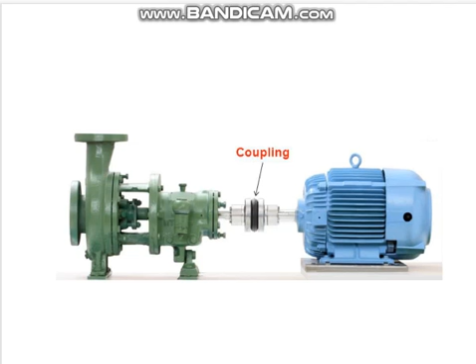We were seeing about the couplings. Here is a picture of an electric motor and a pump, used for a centrifugal pump for pumping water. This is the shaft of the motor, and this is the shaft of the pump. Is it necessary that both should be of the same size? Not necessary. The thing joining these two is the coupling.

We have seen the flanged coupling. This is a simple flanged coupling, also called unprotected flanged coupling. The diagram is like this. We will see the design of these things. What are the important things? This is the shaft, the keys are at right angles. In the side view, this will be at right angles, and the diameters, capital D, D1, D2, these are important. The diameter of the bolt and the thickness of the flanges, TF, and this is the length of the flange. These are the important things.

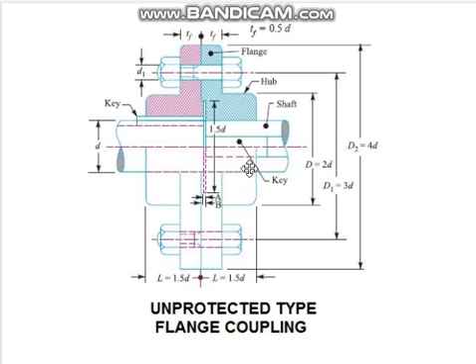Similarly, when you come to the protected type, this is the protected type flange coupling. Only that a little protection is provided. Protection to whom? When it is rotating, it should not catch any loose garments or sleeves of shirts, and it should not pull or hit the hands of the workers. So when it is like this, the nuts and bolts are not exposed, that is why protection. This is much similar, only that there is this TP extra, the thickness of protection. TF is the thickness of the flange, TP is the thickness of protection. The proportion given is 0.25 D, and that's what you have to use.

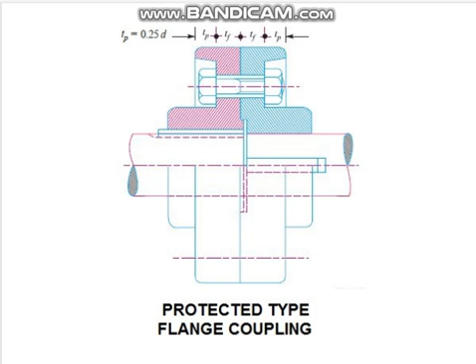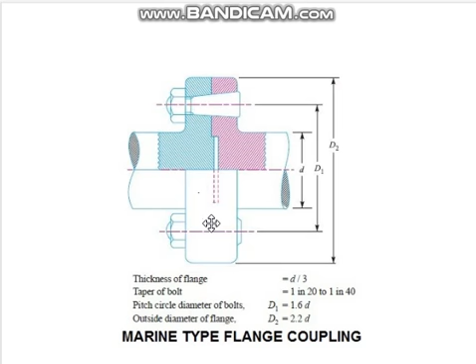Then there is another coupling called marine type flange coupling. This is also much similar, only that the shaft itself, you see, there is no key involved. The shaft end itself is forged in such a way that it becomes a flange. Also here we are not using an ordinary nut and bolt. Some tapered bolt is used, and nut. This is called marine type flange coupling. Marine means they must be using these things for use in ships and other things, in sea applications.

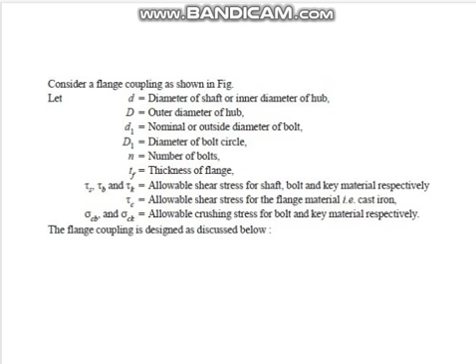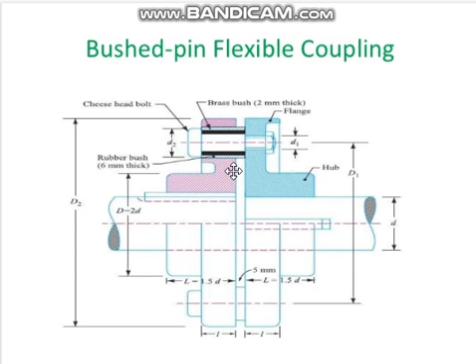How much flexibility, in what way is it flexible? If any angular misalignment is there, it may vary, some 2 degrees, 3 degrees, maybe maximum 5 degrees, not more than that, of angular misalignment can be taken. This also will design. Here you see there is a space, 5 mm space between these two. So this is the change when we are designing.

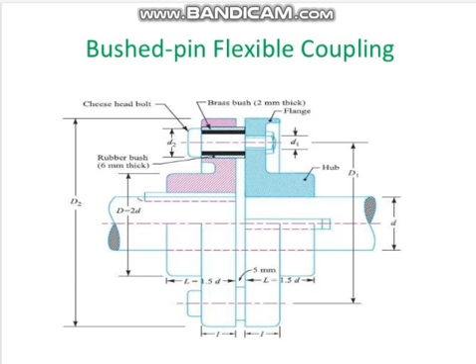We have already seen how the rigid flanged couplings look. They are widespread in use, simple in construction, and they are rigid couplings. They transmit force by shape and friction. That's it. There is another rigid coupling here.

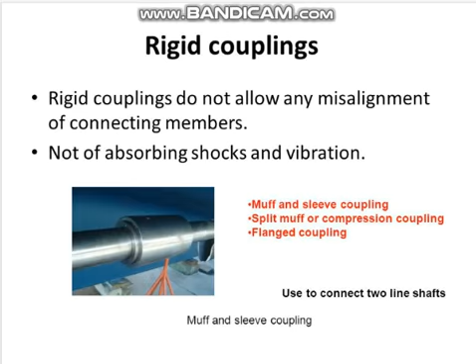Can you identify this coupling, what it is? This coupling is the simple muff coupling or sleeve coupling, without the split. The advantage of this is there are no projecting parts, therefore less chance of accidents and other things. But the thing is, more space is required to insert this sleeve in the middle. And this is the universal coupling. You can see here the double universal joint assembled, and this is a single universal joint.

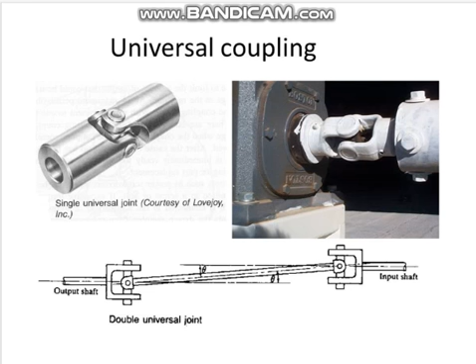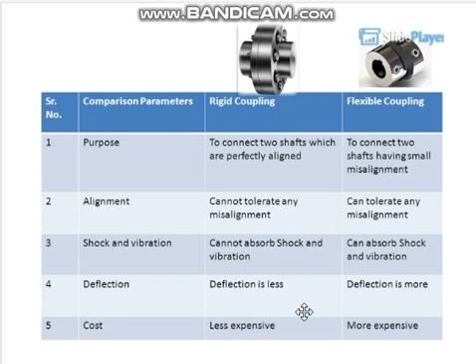Here is the comparison between rigid coupling and flexible coupling. Rigid coupling is used for connecting perfectly aligned shafts, while flexible coupling is used when small misalignment is present. Rigid coupling cannot tolerate any misalignment, but flexible coupling can. Rigid coupling cannot absorb any shock or vibration, while flexible coupling can absorb shock and vibration, though not everything, only some of it. Deflection is less in rigid coupling and more in flexible coupling. Rigid coupling is less expensive, flexible coupling is more expensive.

Now let us come to the design of the unprotected flange coupling. We have already seen the design of muff coupling. Now let us see about the flanged coupling.

Let D be the diameter of the shaft, and for our design we are assuming both shafts are of the same diameter, though in actual practice they may differ. The outside diameter of the hub, capital D, is taken as 2 times the diameter of the shaft. These are empirical relations.

You get all the dimensions just by looking at the figure. D1 is the PCD, meaning pitch circle diameter of the bolts, that is, from the center point of one bolt to the center point of another bolt. PCD is 3 times the diameter, and the outside diameter of the flange is taken as 4 times the diameter. So this is 1 times diameter, this is 2 times, this is 3 times, this is 4 times diameter. It is very simple to remember, is it not?

This little projection here is 1.5 times the diameter, and the length of the hub is also 1.5 times the diameter, with this diameter being D1. And TF is also related to the length of the flange, using some proportion.

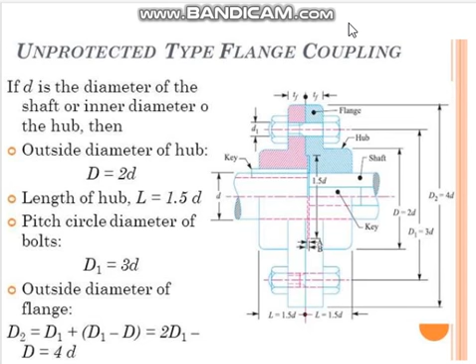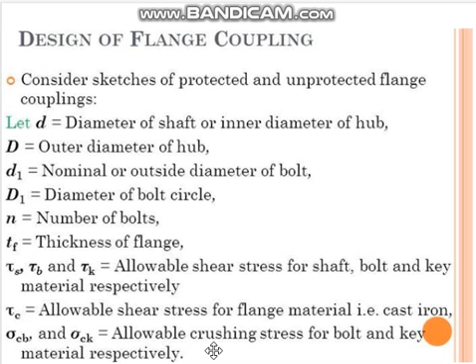So these are the notations we'll be using: small d, capital D, small d1, capital D1, N is the number of bolts, TF is the thickness of the flange, tau S is the shear stress for shaft, tau B is the shear stress for bolt, tau K is the shear stress for key. All may be different materials, but it can be the same when we are solving problems, to keep it simple. Tau C is the allowable shear stress for the flange material if it is cast iron or something. So many things are there: shaft, bolt, key, flange. Sigma CB and sigma CK are the crushing stresses for bolt and key materials respectively.

Now, whether it is a shaft, a key, or a coupling, the first step is to design the shaft. So for designing the shaft, we use T equals pi by 16 tau D cube, from which we first find the diameter D, and afterwards the second step is design of the hub.

In the design of the hub, we consider it to be hollow, but all those dimensions are already according to the proportions we found out. What we are doing is only finding the induced shear stress and checking whether it is within the permissible limit or not. So with this formula, T equals pi by 16 tau D cube, into 1 minus k to the power 4, this is the formula you should use for designing the hub, considering it to be a hollow shaft.

The outer diameter of the hub is usually taken as twice the diameter. From this relation, the induced shear stress in the hub is checked, and the length of the hub is taken as 1.5d. This is also a proportion, and we have already seen all the proportions in the figure itself.

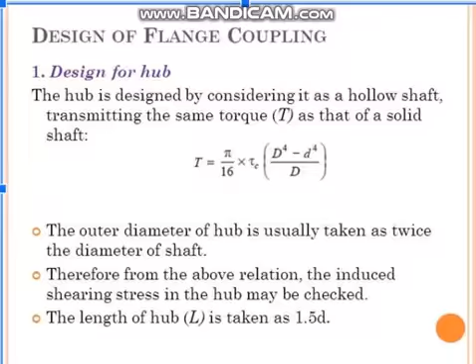Next is the design of the key. The key is designed with usual proportions, then checked for shearing and crushing stresses. Usual proportions mean d by 4 and d by 6, that is the width and the thickness. The material of the key is usually the same as that of the shaft, and the length of the key is taken equal to the length of the hub.

Length is according to whatever length we should take. And the design of the flange, the flange at the junction of the hub - the junction of the hub is under shear.

When this is rotating and the key is rotating, this is rotating, and these nut bolts alone are stationary. Suppose this is rotating, this is not rotating - what will happen? It will shear here, it will cut here. How will it cut? It will cut on the circumference, the entire circumference.

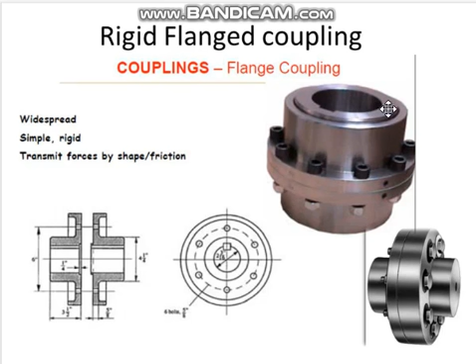This thing is there, no? If this part is rotating and this is not rotating, this flange is not rotating, this hub is rotating, what will happen? In the joint here, the entire circumference, it will shear off. That is the meaning. In that case, what will be this area of failure?

Area of failure will be the circumference pi capital D, and the thickness is TF. Pi D TF, that will be the area. So that you should put here. Circumference of the hub and thickness, this is the area, into shear stress into radius will give you the torque.

Mathematically, T is equal to pi D into TF, tau C, into D by 2. From this, the thickness of the flange is usually taken as half the diameter of the shaft. Thickness of the flange means TF is 0.5 small d. Therefore, from the above relation, the induced shear stress in the flange can be checked.

Then next comes the design of bolts. How do they fail? This bolt - suppose when we are designing this, we thought that this is not rotating, other things are all fine, so here it sheared.

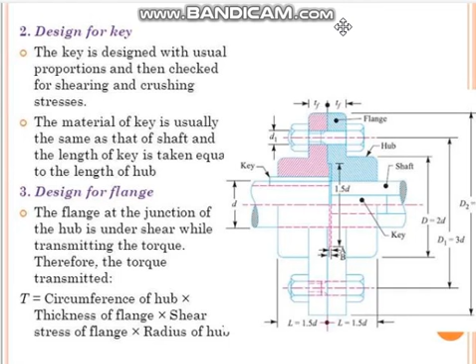Suppose now when we are designing this, what we'll think is this also is trying to rotate, only that this is not rotating. Then what happens in the middle? This bolt gets sheared off. How many nuts at the same time? Suppose there are 8 nuts there, so 8 nuts should be sheared. If there are 4, 4 should be sheared, like that.

So the bolts are subjected to shear stress due to the torque transmitted. The number of bolts is small n. This depends upon the diameter of the shaft. The pitch circle diameter, capital D1, is taken as 3d. This we saw in the figure itself.

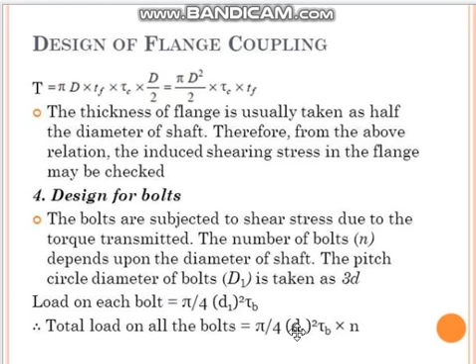Load on each bolt - what is the area of the bolt that is resisting? Pi by 4 d1 square. If you multiply this by shear stress, you get the load on one bolt, and there are n bolts, so total load is this into small n. Therefore, the torque transmitted, capital T, is equal to pi by 4 d1 square into tau b into n into capital D1 by 2. Why capital D1 by 2?

Where are the bolts? Bolts are at a distance d1, so this is d1 by 2, because from the center you have to take the distance. When you are designing the key, the distance is only small d by 2. When you are designing the hub, it is breaking here, this distance is capital D by 2. When you are designing the bolt, it is this distance, so that distance is capital D1 by 2. These things are changing at every point, for key, for flange, and for bolts.

From this equation, the diameter of the bolt may be determined. You can calculate it. Now that you have the diameter of the bolt, you should check for crushing. There are two ways in which this may fail - one is in shearing, the other is in crushing.

Crushing - the area will be this much. That means the projected area, tf into d1 it should be. tf into d1 and n number of bolts, so this is the crushing area.

You should think a little about how this area comes. Crushing area is the projected area. How the crushing takes place - you should consider only half of this flange alone, not the entire thing, because crushing takes place in the half flange only. So the total crushing strength, you will get this equation.

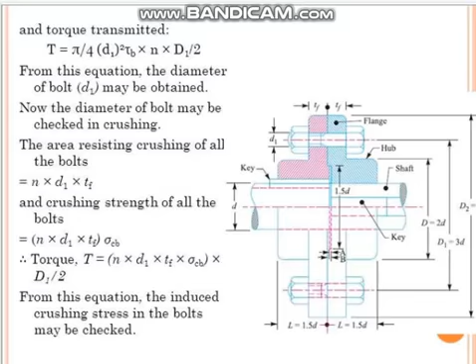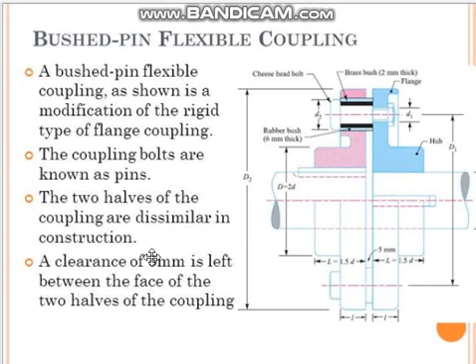Between them 5 mm is left. Next, this bush pin type flexible coupling, the main modification is to reduce the bearing pressure on the rubber or leather bushes, and it should not exceed 0.5 Newton per millimeter square. Instead of the nut bolts, simple bolts, we are using pins. This pin we are using is called a pin, otherwise you can call it a cheese head bolt or something. The bearing pressure should be within 0.5 Newton per mm square, within that you should maintain.

Actually, because there is a rubber bush here and also a brass bush here, it allows a little angular misalignment, maybe 2 to 5 degrees. In order to keep the low bearing pressure, the pitch circle diameter and pin size are increased, it seems, because this should be less.

Now let L be the length of the bush in the flange. L is from here to here. In this gap of 5 mm also, the bush is there. D2 is the diameter of the bush.

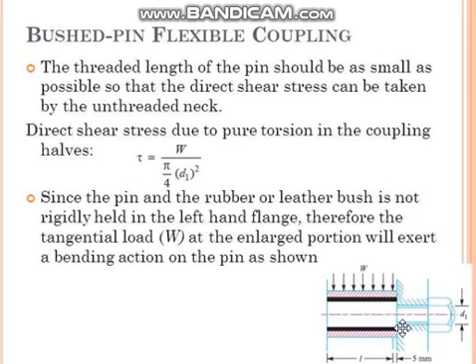If you see here, this W is acting at the center. And center means what? It is at the distance of L by 2, and also there is a gap of 5. So this L by 2 plus 5 will be the distance at which this is acting, and that into W will give you the moment.

Once you know moment upon section modulus, this is for each pin we are calculating. The bending stress is bending moment upon section modulus. Bending moment we are getting as W into L by 2 plus 5, divided by Z which is pi by 32 d1 cube.

Since the pin is subjected to bending and shear, crushing is different, bearing pressure is different, that is a localized stress. But these are bodily stresses. These body stresses are two: one is bending as well as shear. See, bending stress is sigma stress, shear stress is tau stress. These are two different categories of stresses.

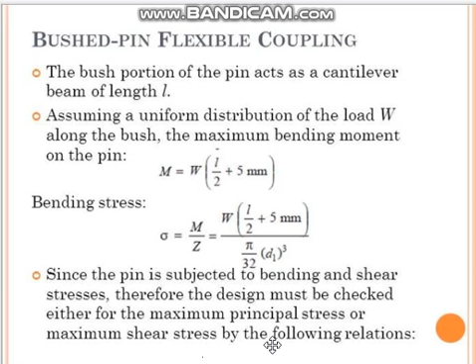Therefore, the design must be checked either for maximum principal stress or maximum shear stress by the following relations. You have to go for principal stresses, because there is sigma also, there is tau also. The maximum principal stress formula is half of sigma plus square root of sigma square plus 4 tau square. And the maximum shear stress is half of square root of sigma square plus 4 tau square. So these are the two formulas by which you can find out the principal stresses: sigma 1 is the maximum principal stress, and tau maximum is the maximum shear stress.

The value of principal stresses varies from 28 to 42 MPa, depending upon the material. After designing the pins, the rubber bush, the hub, key and flange may be designed in a similar way.

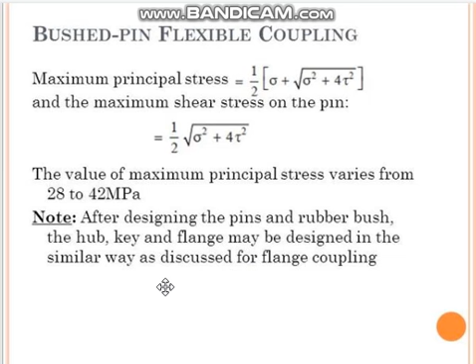I think we can see one problem. Design a bushed pin type flexible coupling to connect a pump shaft to a motor shaft transmitting 32 kilowatts at 960 RPM. The overall torque is 20% more.

This is 20% more torque, that means if you are considering T maximum, it will be 1.2 times of T mean, the mean torque. The material properties are the allowable shear stress and crushing stress for shaft and key, that is tau for shaft and key.

They said okay, that is the same material. That means this tau k or tau s is 40 MPa, and the crushing stress will be 80 MPa, for shaft as well as key. And then allowable shear stress for cast iron is 15 MPa, that is tau c is 15 MPa. This will be much less compared to the other, because this is mild steel and this is cast iron. And the bearing pressure is only 0.8 Newton per mm square.

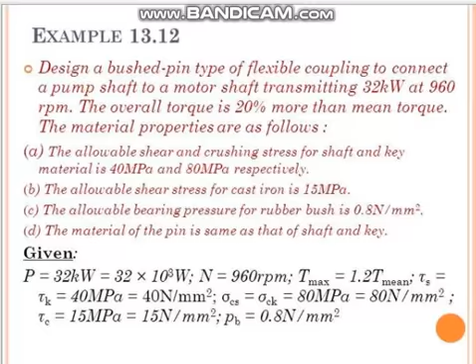And then first what you have to do is find the diameter of the shaft. For diameter of the shaft, first you have to find out what is T.

If T is not directly given in the problem and power is given, we have to calculate T. So first, what we are getting here in this power equation is mean torque, which comes to 318.3 Newton meter. Then the maximum torque you have to calculate, because they said 20% more, so you have to multiply it by 1.2.

And then what you have to do is the torque transmitted by the shaft, capital T maximum, is 7.86 d cube. In terms of d cube you are getting that, and you equate it to shear stress of the shaft. When you equate that, you will get the value 36.5, and they have rounded it to 40 mm.

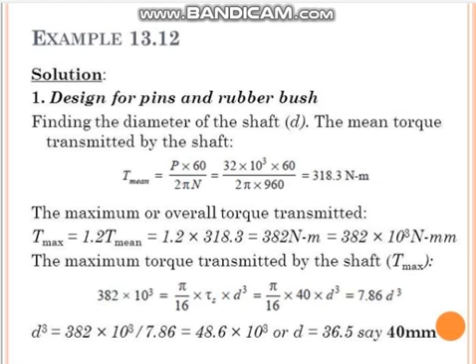Now next, what you have to do is, we have discussed in rigid type flanged coupling that the number of bolts for a 40 mm diameter shaft is 3. You will get a table there: if it is 40, it is 3, and you should know when to take 4, when to take 6, like that.

In flexible coupling, we shall use the number of pins n as 6. For our problem here, we take it as 6. Actually, in real practice, it depends upon the diameter of the shaft.

So the diameter of the pin D1 will be 0.5d upon square root of n. This is the formula that we are using, where small d is the diameter of the shaft. This comes to 8.2 millimeters.

The length of the pin of least diameter, that is capital D1, is 20 mm, is threaded and secured in the right hand coupling half by a standard nut and washer. Actually, there are threads in the right hand coupling half also, and nut and washer also are there. And the length of the pin of least diameter is D.

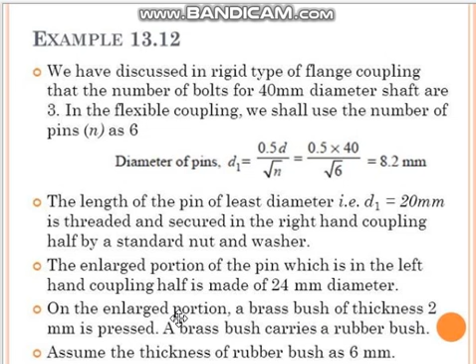The enlarged portion in the left hand coupling is made of 24 mm diameter, a little more than that. On the enlarged portion, a brass bush of 2 mm thickness is pressed. The brass bush carries a rubber bush, and the rubber bush thickness is 6 mm. That means on the radius side 2 mm is increasing, on the radius side 6 mm is increasing, so 8 mm is increasing on this, as you will see.

So therefore, the overall diameter of the rubber bush will be D2 equal to 24 plus 2 plus 2 plus 2 into 2 plus 2 into 6, so 40 mm. So the pitch circle diameter will be, then you can calculate, 2D plus D2 plus 2 into 6, that is 2 times the diameter plus 40 plus 12. From where are you getting this?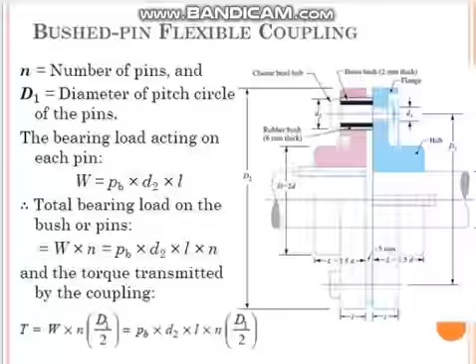Then the length of the bush in the flange is L, and the bearing load acting is D2 into L into PB. PB is given, so this is 40. We have calculated into L, that means W is 32 into L.

This multiplied by D1 by 2 will give you the torque. So torque is equal to maximum torque only. On all designs, you take maximum torque. So 32 into L into 6 into 132 by 2, you will get this value, and tau maximum. From that you will get L, and L will be 30.1, say 32, and you can find out what is W in that case, will be 32 into L, and this comes to 1024 newtons.

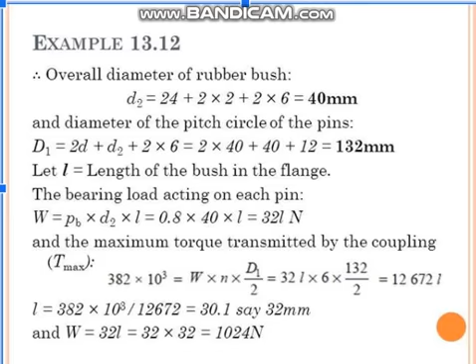And then the direct stress due to pure torsion in the coupling halves. In the coupling halves, direct stress will be, where it will be failing? It will be failing at... what is failing? Direct stress due to pure torsion in the coupling halves. The coupling is failing at D1.

Oh no, this is not coupling. This is the direct shear stress in the pin, that's why we are using D1. So this is pi by 4 into 20 square. In the enlarged portion, the shearing will not take place. Shearing will take place at the minimum section, where minimum section is small d1.

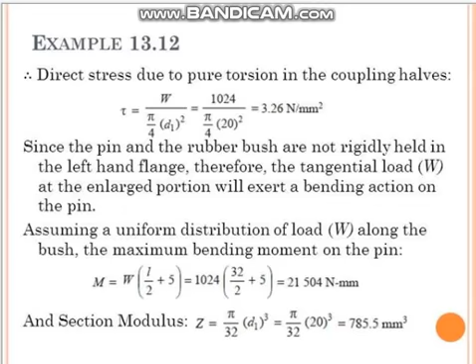So the pin and the rubber bush are not rigidly held, therefore you have to consider it as a cantilever, and then from there you have to find out. Earlier we have seen how to calculate the bending moment and the section modulus, and then from that you calculate the bending stress, it comes to 27.4 newton per mm square.

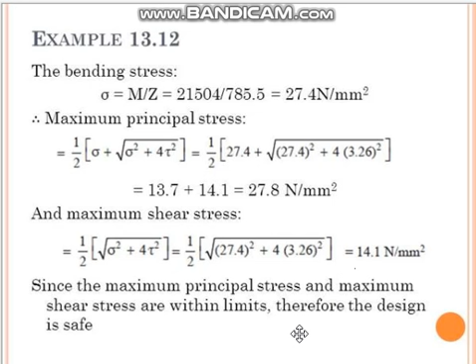Then you calculate the principal shear stress, maximum principal shear stress, and maximum shear stress. These two formulae we have already seen. You are getting this much, 27.8 and 14.1. Since the maximum principal stress and maximum shear stress are within limits, you compare with the permissible stresses, then the design is safe, we can conclude.

Now design of the hub. This also you can do first, but in this book it is given like this, so we have designed the pins first. Now capital D is 2 times the diameter of the shaft, so this is 80 mm, by the empirical relation. The length of the hub also is by empirical relation, 1.5D, it is coming to 60.

And then here you can calculate the induced, considering it as the hollow shaft, and you can find out what is the induced shear stress, and see if this is within the permissible limits.

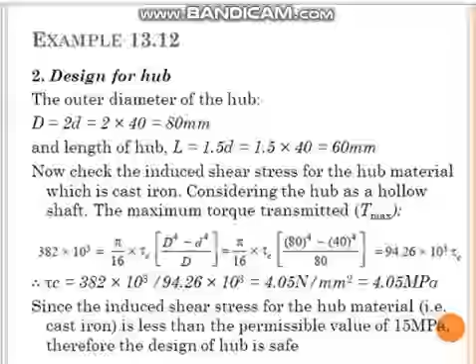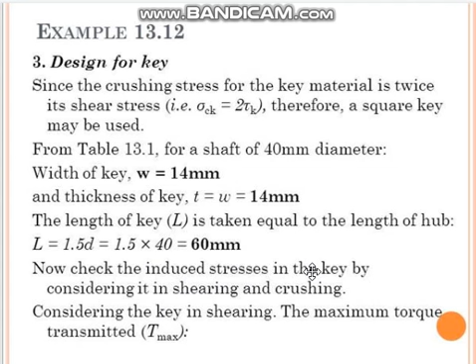Next, design of the key. You can take this from the data books. Otherwise, what you can do is width will be d by 4, and thickness is d by 6. With that you can calculate, and then you can check the induced stresses, one in shearing and one in crushing, within the permissible limit or not, and that is what they have checked here.

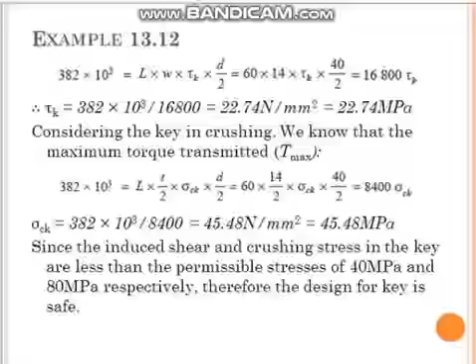I am going further. Then the design of the flange. The thickness of the flange is taken as 0.5D, this is an empirical relation. And how does the flange fail? Flange fails at the junction of the hub. So this is the formula that we have already seen.

Pi d square by 2. You check this formula whether it was the same as before, and from this you can find out the crushing, induced shear stress, and see how much it is being induced. It is being induced is 1.9 MPa only, whereas 15 is the permissible thing, so it is safe.

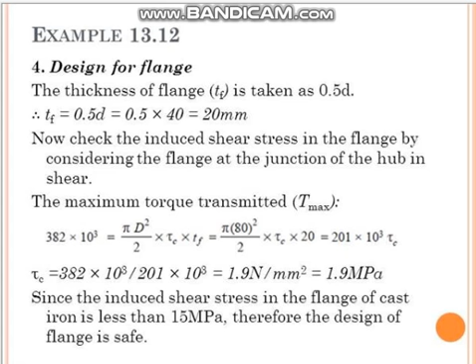So with that that's all. What are the things that we are designing? What all we have to design? We have to design the shaft, we have to design the hub, and we have to design the flange, and then we have to design the pins. So if you open your book, follow the procedure given by those people. If any problem, you contact me.

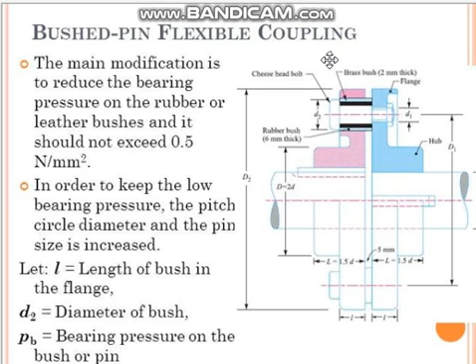So with this we finish this chapter. Now this third unit is finished. In the next lecture we'll start a new unit, a new chapter. Thank you very much.